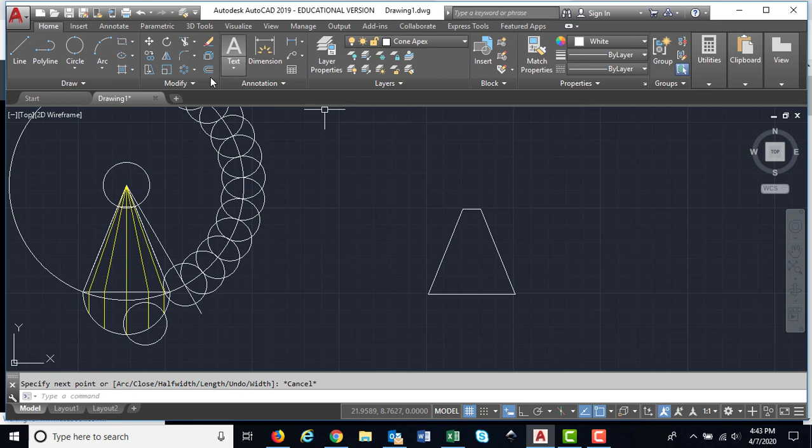Alright, so basically what I started with here is we have a 2.5 inch base. There's a couple different things you can do from here. We could do a fillet command of this one, and this one shows us where the apex is, but a lot of times we end up losing our top section there.

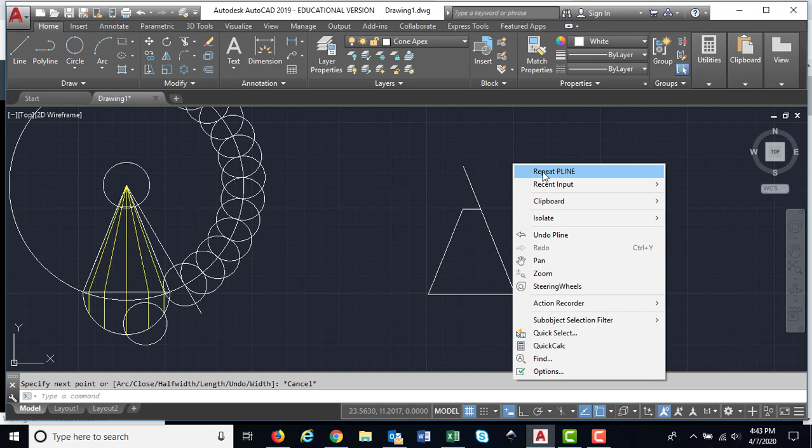So let's Control Z this, and sometimes I like to be able to put that on a separate layer as well. So I'm going to take a polyline, and I'm going to go from here, and I just go up and cross it, escape, repeat polyline, and do the same thing. It's putting one layer over top of another.

Yes, we have duplicate lines, but it's okay. Alright, we're going to trim. We're going to pick this line and this line, right click, eliminate those two.

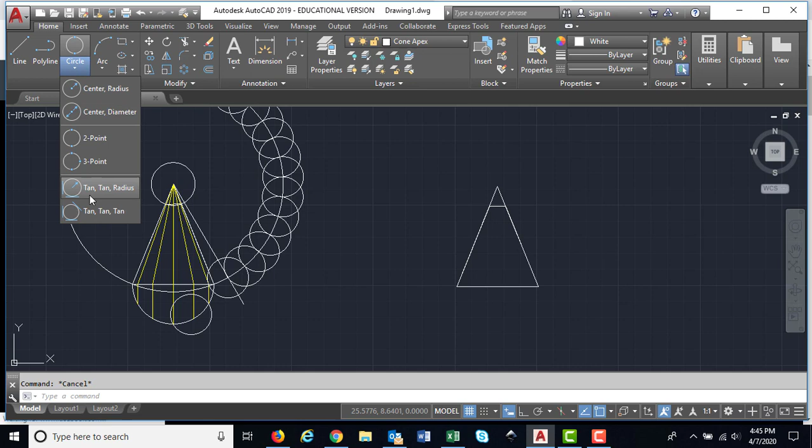So now we're going to create this bottom circle on this section. I like to use, you could easily find midpoint and then do center radius, but in a case like this, a lot of times I'll just come over and do a 2-point circle to make sure that I am hitting both those outside lines, with no mistake there because it's snapping to my reference points. I'm going to leave this on just like that.

Then I want to come in here, I'm going to take a polyline. The second I come close to this outside edge, it shows me the center point, and I'm going to go ahead and come straight down. When I have it straight down, I'm going to incorporate that into my pattern anyway.

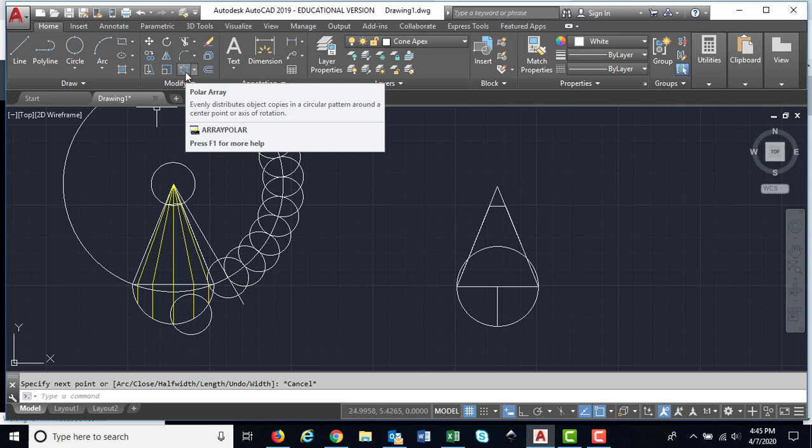Alright, so what I like to do with this is now I'm going to take this and turn this into a polar array. You can do it several different sections. Let me start with this. So polar array, I selected the object I want to array, right click, it's going to ask me for the base point.

Now I'm going to put in my 12 sections. Remember, if we're doing pipe fitting, particularly if we want to do 22s and 45s, then we want to go to 16 sections instead. So it does help, especially if you're thinking about fittings - if you're going to lay a piece of pipe out on the ticker paper like I showed you in the past, then we would do 16 sections instead of 12. 12 gives us 360 divided by 12, giving us 30-degree increments at that point.

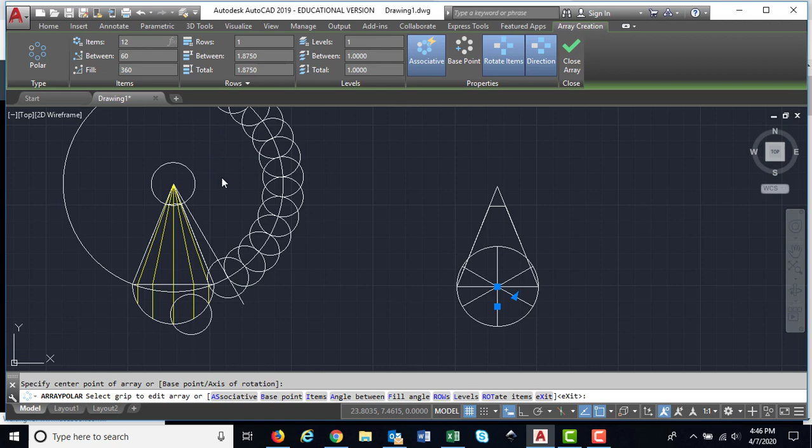So when you look at that, we'll be able to figure that out and go from there. Let me close this array, and it gave me my 12 points. Now you notice these 12 points are just like this. If I want, I can come up here and explode them individually. It's going to ask me to select object, then enter, and then each one of these lines is individual. So now I can erase the top half if I would like.

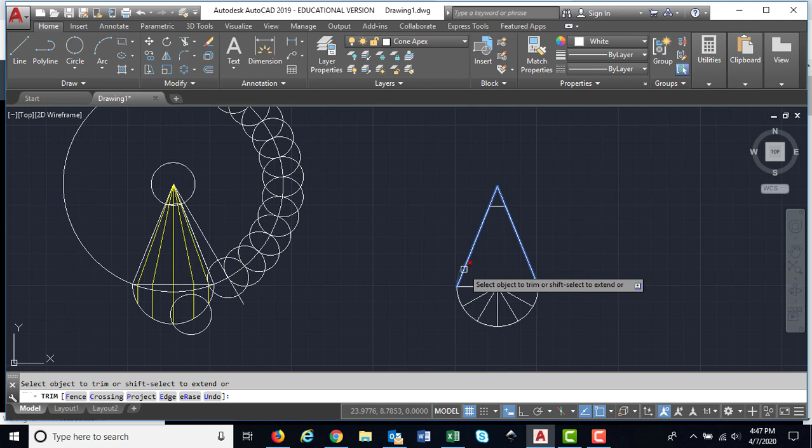And I just come through and delete those, and I would want to trim this out in this section. So let's trim, and we need to select the two pieces on top that we want to trim with. Right click, we're going to go to this line and this line. Let me go right over this one. We go there, enter, and then right click, repeat polyline.

Same thing. See how the green line tells me where I am going straight up? I can escape, right click, repeat polyline, and then boom, straight up to my green line again, and right click.

And now if I want, like in - I hope that you watched Malcolm's video as well - we could mirror these two. We'd want to mirror this one and this one about this face, but in all honesty, for me it's almost just as quick to go this way, because what I do next is I actually...

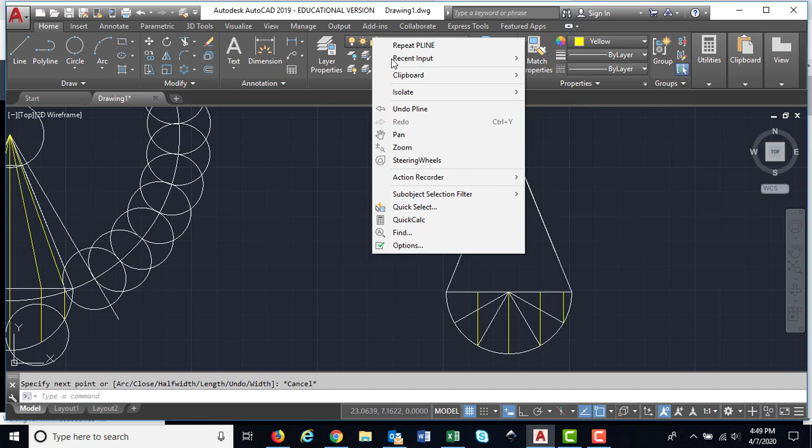Take a repeat polyline and go from here to there, and then just straight to that point. I'm going to come back down to there, escape, repeat polyline, go to there, and repeat again.

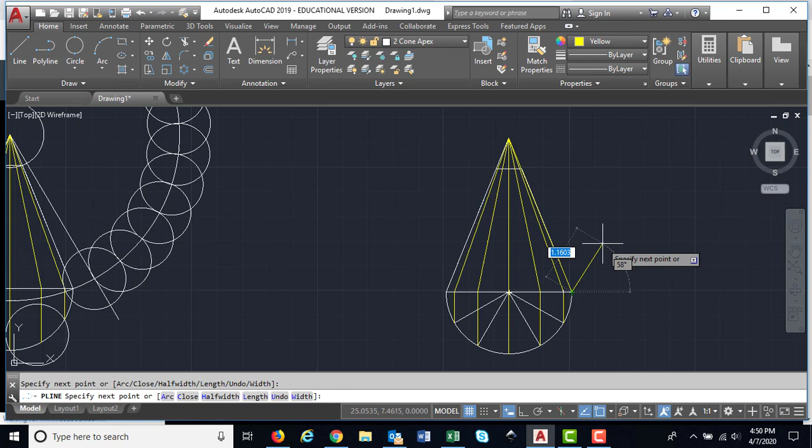To there. And sometimes even in this case, I'm going to go ahead and make my yellow lines on my outside divisions, just because if I wanted to put that on a separate layer and get rid of the entire base piece, now I have all of my pieces that I can reference from in yellow.

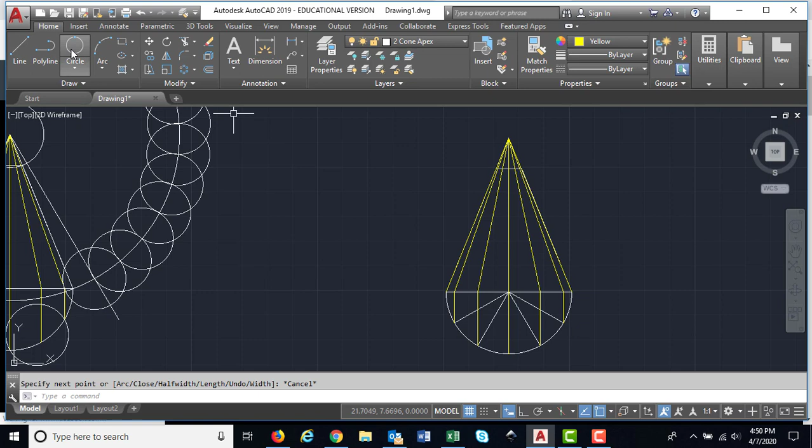Now we're going to go ahead and go to a circle. In this case, I do need the center radius because everything is going to come off the center radius. I want to reference to the outside line, but now I made this one yellow.

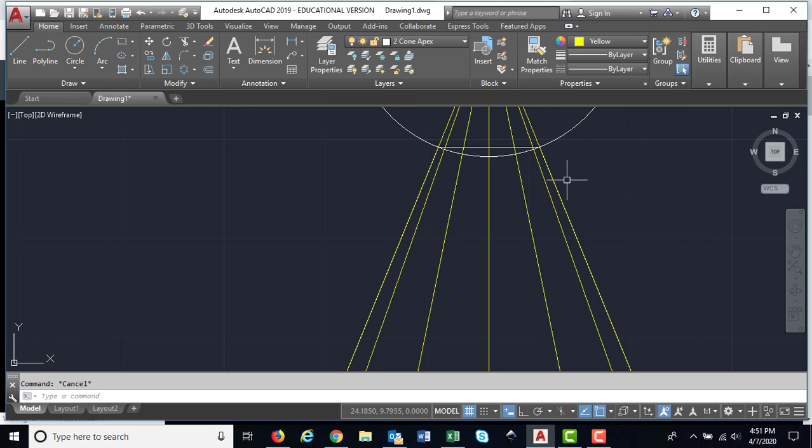Say I wanted to switch it back to white. Let me click on this line, and from here I just come back and switch it to white. Escape, and we're right back to it. I'm going to repeat my circle. I'm going to come close. Oops.

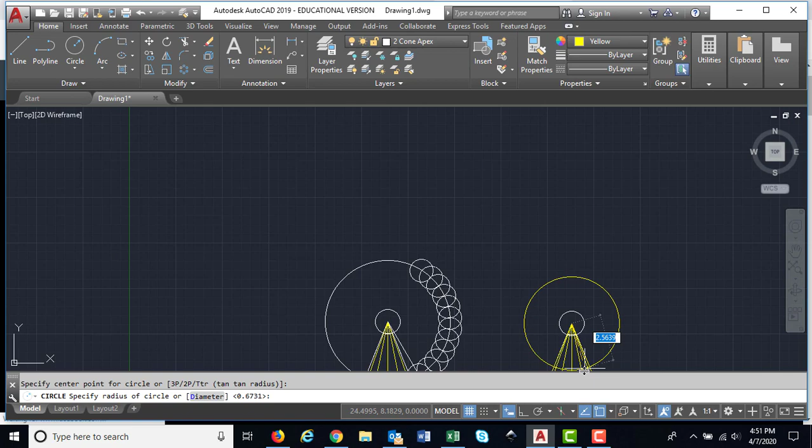Come close to it. Repeat circle, come close, and it's going to grab the same radius and the same center point. Come back to here, and again turn that to white, and turn that one back to white as well.

Now the next step is to create this first starting line. I'm going to do a polyline from here, and I always like my starting line to be long. It doesn't have to be way out here, but I usually like to put it just a little bit past this point.

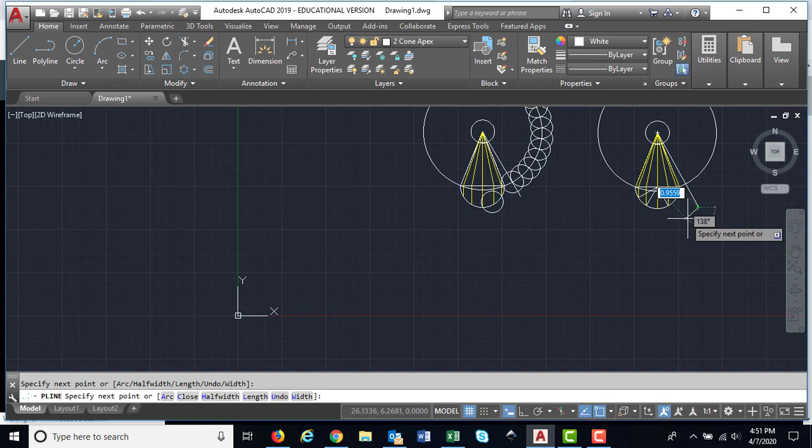When you're doing cone radial shapes, there's a lot of times you might want to do a longer piece or a bigger piece, so we can do these in different incremental sections. Adding a half inch, adding an inch, you can do a whole lot of patterns just off of layering in this one exact piece.

You've got a 2-inch vent pipe that's very common in plumbing. My apex up at the top is going to be the same, but my base piece might be different depending on my length. So from here to here might be multiple dimensions, say 10 inch, 12, 14, 16. Once I save this file, I'd save it as a 2-inch vent pipe apex, or just a 2-inch vent pipe straight base, and I could come back and have different increments and different layers within doing this without having to redraw the whole thing 10 times.

Now we need to create the 12 different divisions over here so we can put that out. I'm going to come back to circle, go back to my 2-point line, go from here to there, and I want to copy. I'm going to select the object, right click, and it's going to ask me where my center point is. There: 1, 2, 3, 4, 5, 6, 7, 8, 9, 10, 11, and 12.

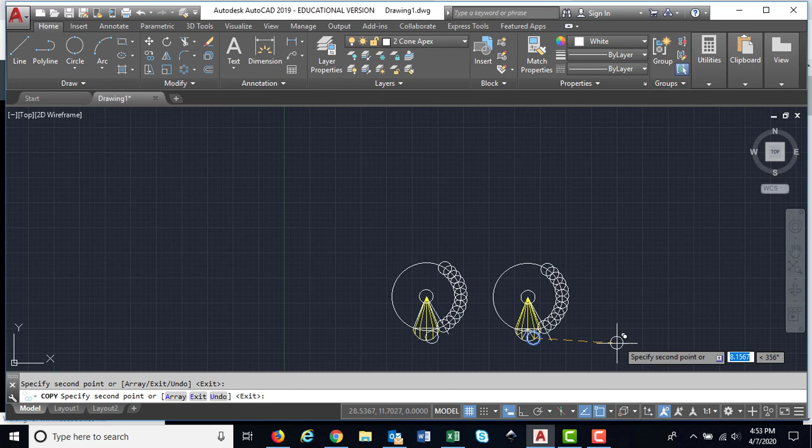At this point I'm going to escape out of here, and then come back to a polyline, and I'm going to switch it back over to a yellow. And from here, you know, Malcolm makes a good point in his video to make sure that you're not snapping to that or to this.

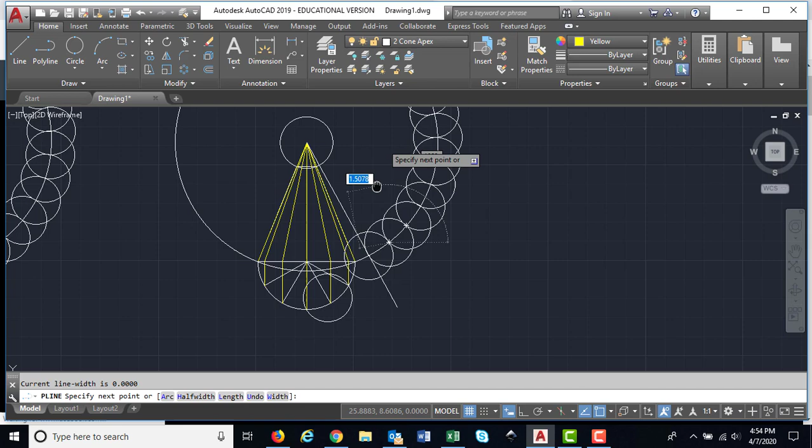So when you get close, make sure you're actually hitting where you want to be. We're going to go from there and then back to — as you can see, it sometimes gives you a fit — so escape, repeat polyline, we'll start here again, and then back to this one, escape, repeat polyline.

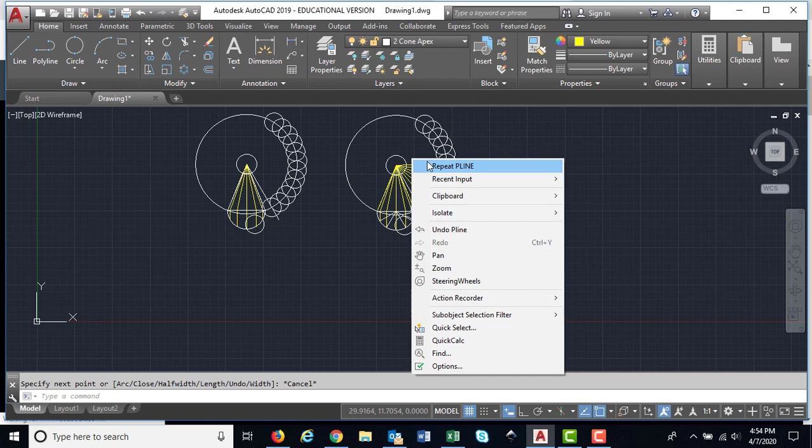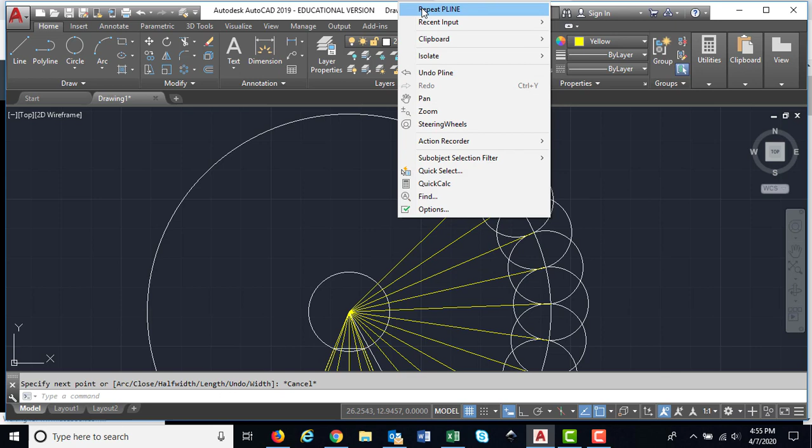You get far away, naturally it's harder. Here to there, escape, repeat polyline, and go from here to there, back to here, escape, repeat polyline, and we'll have one last one.

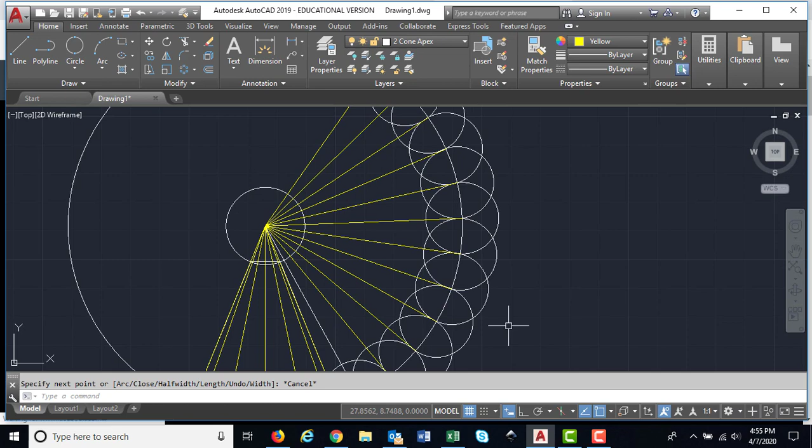So there's a couple different versions you can do. It doesn't, especially on this, when you roll it out, it's not really going to make a difference if you're going straight point to point when you line and do this. So if I were to follow this along in order to get that nice arc shape in here, I would need to do a couple different things.

Before I even start, usually what I'm going to do is put another circle over top of this one and over top of this one, color them red, and change them, because now we're making our pattern. Just bear with me for a second and you'll see exactly what I mean. I'm going to go circle, but I need to do center radius, so I'm going to go off of that one, put it there, and repeat circle.

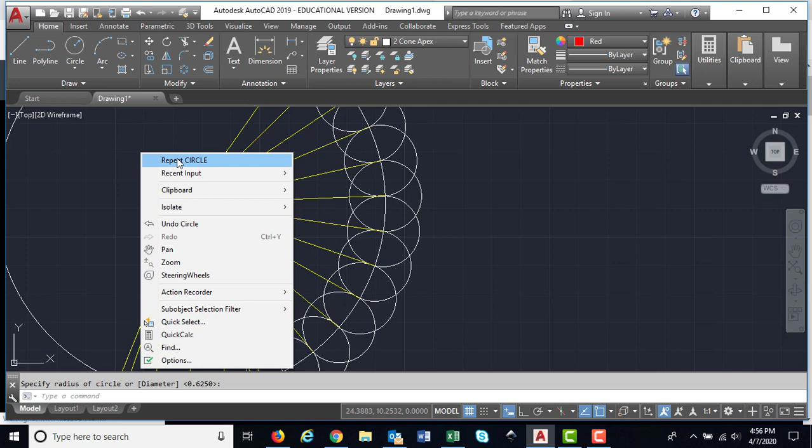So in this case now I've got my two reds, and I'm going to pick those up here in a minute and move that entire pattern over, and then I can trim from there.

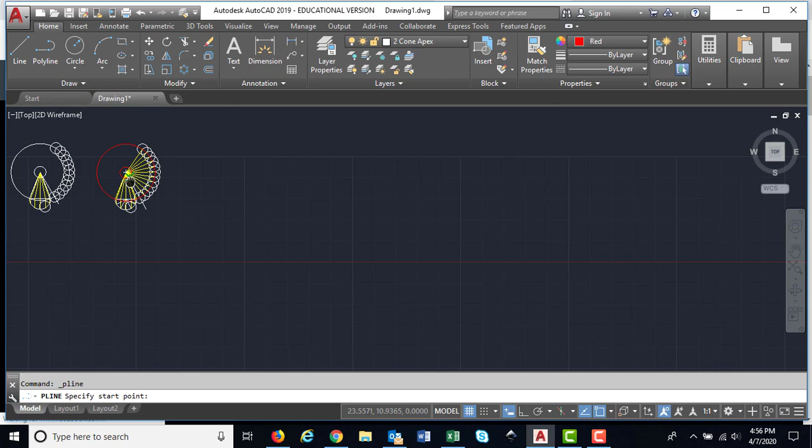Come back to a polyline. I'm going to start here, go to my first line right there. Now I break this up, and I need to repeat polyline again, and I'm going to start from there to there.

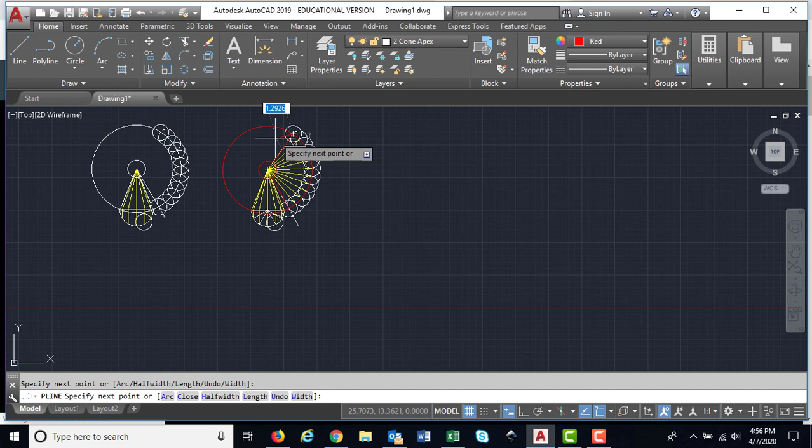So what I can do then is take this, this, this, and this red one, and I'm going to modify them. I'm going to join them, and then copy this, this, this, this — they're going to ask me for a base point, I'll say this, and bring it over here like that. Escape.

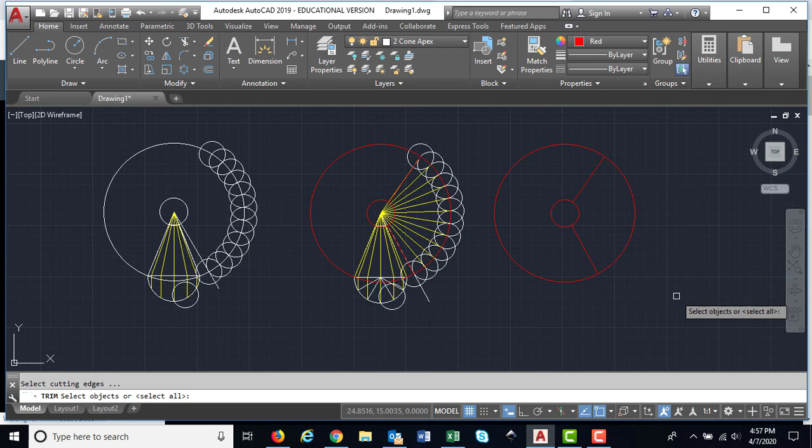Now I can come back, and these are all in different versions. Now I can use my trim function if I want and select all of this. What's an easier way to do that? Naturally, I could come back, trim it, select the entire thing. Now I'm going to right click, and I would trim this and this, and there's my pattern.

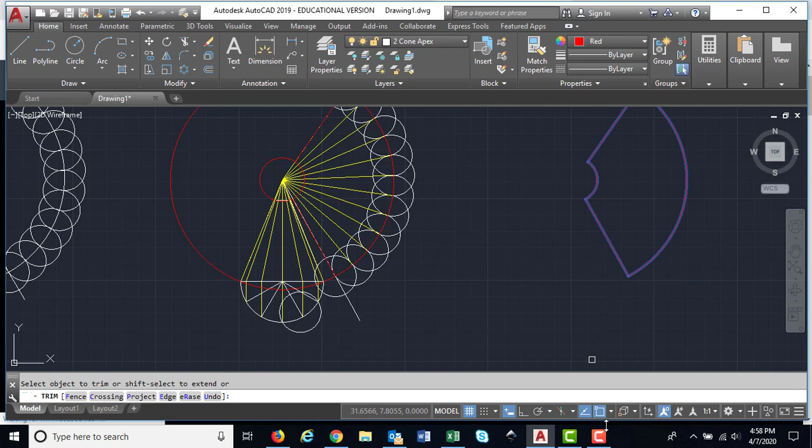Hopefully you enjoyed the video. Wasn't too bad, and as you can tell, you can start to layer these things in and around. All right, have a good day. We'll see you in Parallel or Radial Line Development number 2 next.